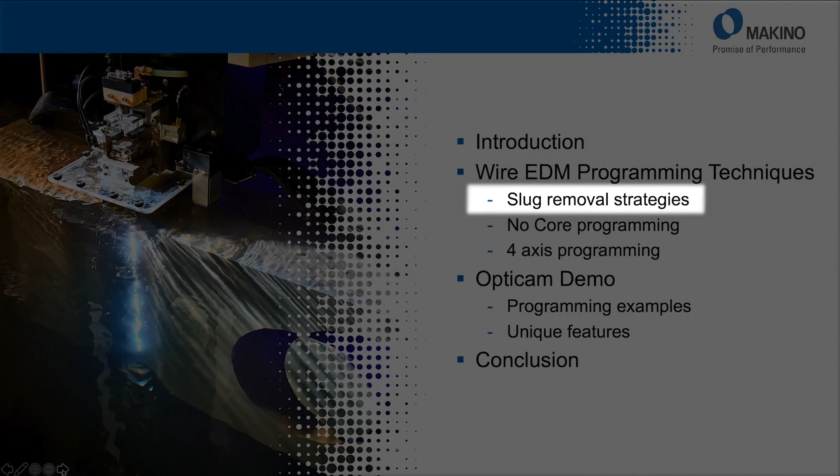Today we're in the Makino Experience Center discussing Wire EDM programming techniques. First, an overview of what we'll cover: slug removal strategies, ways to optimize your programming, no-core programming (pocketing), and 4-axis programming. After the presentation, we'll go to Alan Weeks from Optisolutions, who will give a demonstration of the Opticam software.

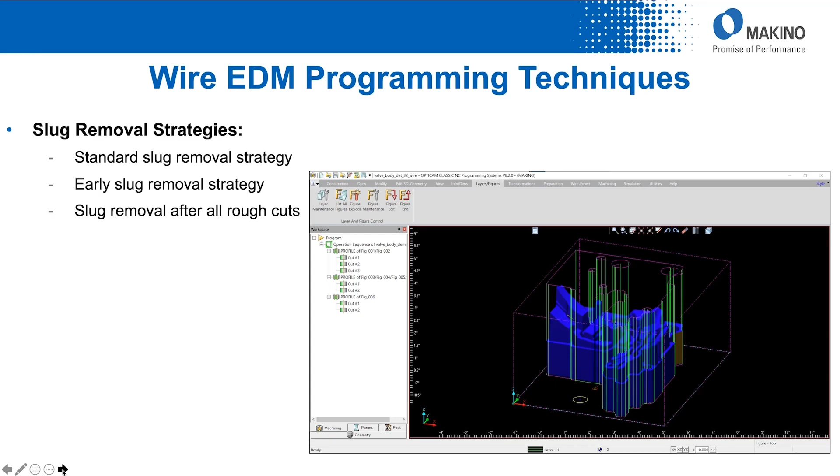Let's get started. First, slug removal strategies. We'll discuss the standard slug removal strategy and explain what that means, then go through early slug removal and slug removal after all of the rough cuts. So what do those mean?

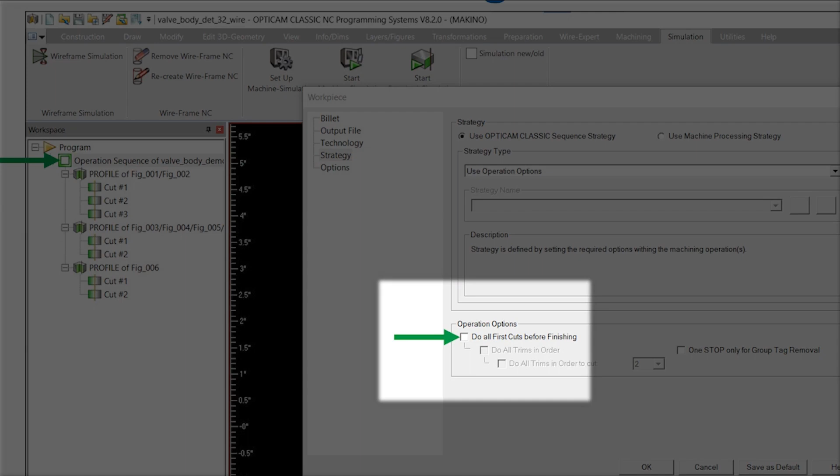A standard slug removal strategy - in Opticam, how am I going to make this work? First, I'll come in here and select my workpiece, and it'll bring up this window. I'm going to not check 'do all first cuts before finishing.' This is a strategy page of the workpiece itself.

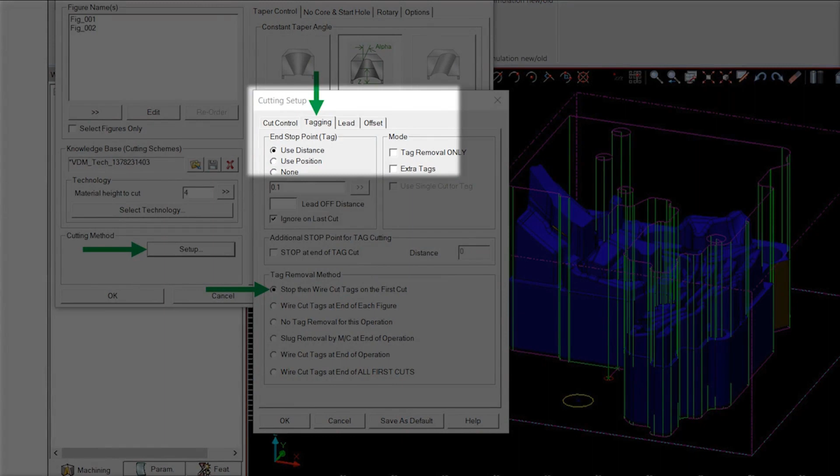Next, I'll go to the profile. This profile is for the holes inside this particular part. When I hit the profile, I go to the setup page and the tagging page, and you can see the tag removal method - I have many options. For this strategy, we're going to use stop, then wire cut tags on the first cut.

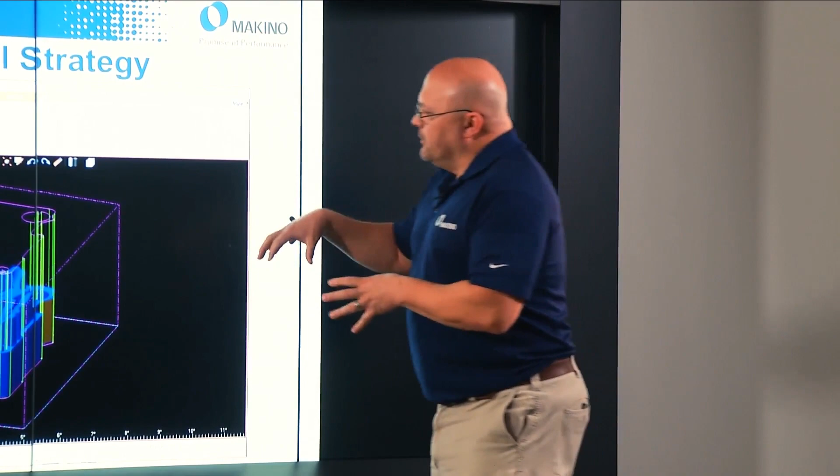Since this is a part with features internal and external, I need to set up a strategy for the outside of the insert. So I'll click on that profile, go to the setup page, tagging page, and wire cut the tags at the end of the operation. I have a video here to show how, by setting up our program that way, it's going to function.

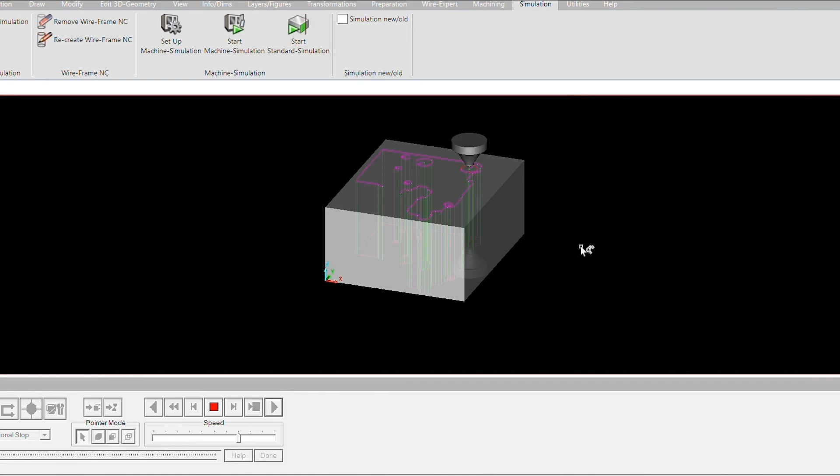Now that we've programmed it that way, it will simulate what it's going to do. We're going to rough the holes, it comes to the stop, then we drop the slug. Every hole internal - these are core pin holes and ejector pin holes - follows the same pattern: rough it, drop the slug, then finish cut it. So every time we're dropping a slug, the operator needs to be there to remove it.

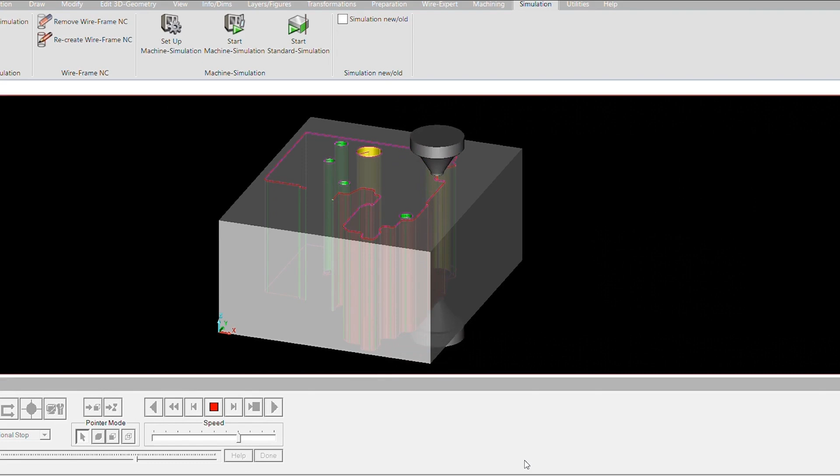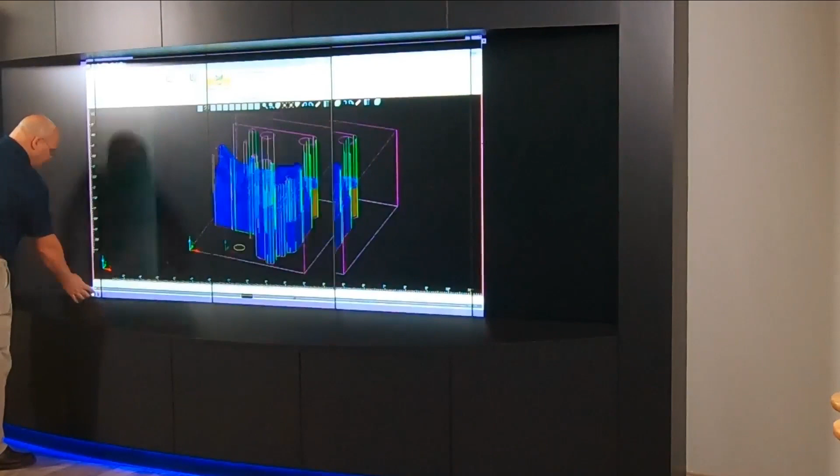This will go through all the holes internally, because that's what we told it to do. Once it's done with the holes, it goes to the insert on the outside, roughing it all the way around, because we told it to wire cut the tag at the end of the operation. Then it goes around and skim cuts it with the tag still connected. It comes to the stop, we cut it off, remove our part, and the part is finished. That's what I'd call a standard strategy for slug removal.

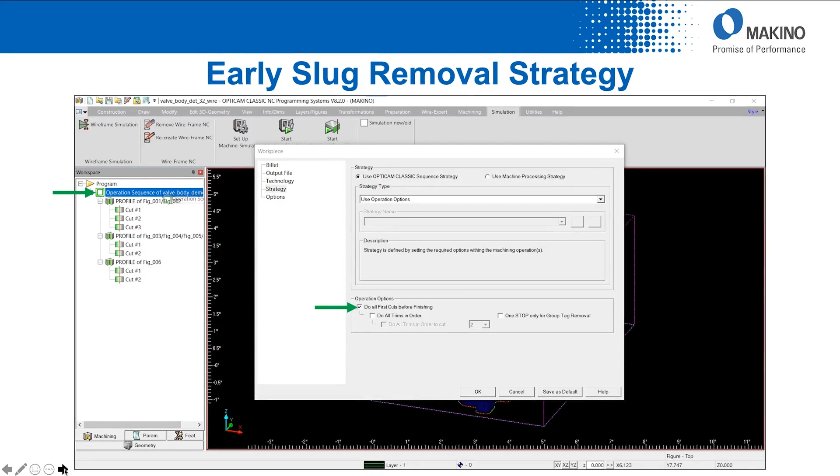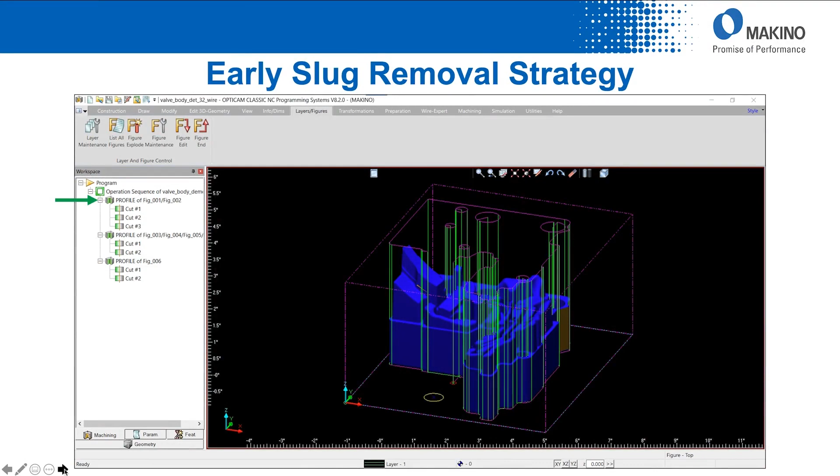Next, the early slug removal strategy. Again, we go to our workpiece, go to the strategy page. Now, unlike before where 'do all first cuts before finishing' was unchecked, we're going to check that. We go to our workpiece profile - these are for the holes - same thing we did before.

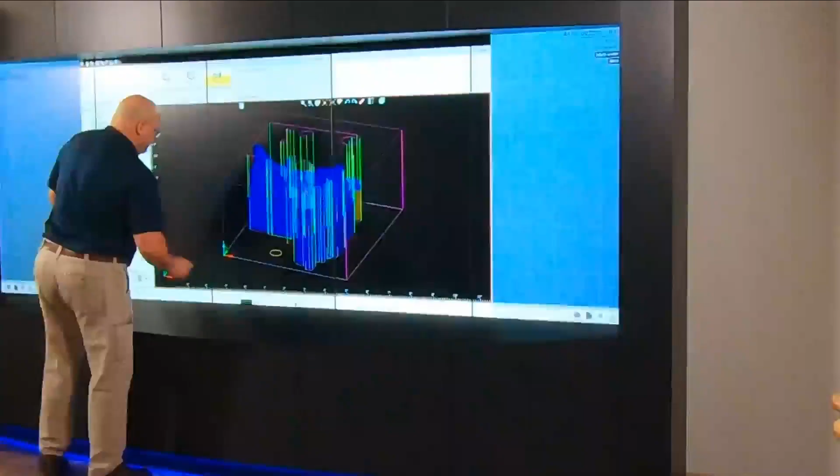Stop then wire cut tags on first cut. For the insert itself, we go to that profile, setup page, tagging page - again, wire cut tags at end of operation. So the only thing we've changed is telling the workpiece to do all first cuts. Just by checking one box, this video will show how that functions.

The simulation starts up. We did the same thing as before - it went to the stop and we removed the slug. But now instead of finish cutting, we're going to rough all of the holes first.

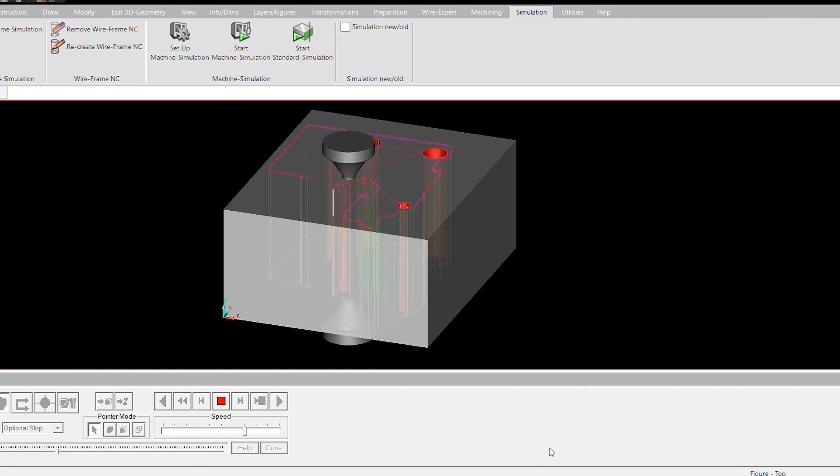You might say, why would I do that? Well, the idea is to minimize operator intervention time at the machine. By doing this, the only time I need to be at the machine is when I'm dropping those slugs for those holes. Once I've dropped all the slugs, now it's roughing the outside of the part. All of this is unmanned machine time.

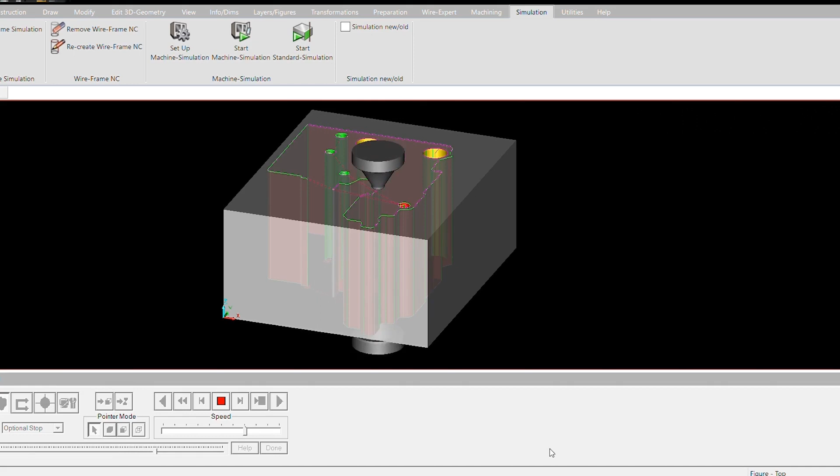Rough the outside, now it goes back to the holes to finish it. All of this is going to be automatic without the operator being there. And then it's going to go and finish the outside of the block. Then we're going to drop the part off. It goes to the stop, the operator comes back, we cut the slug, and the part's finished.

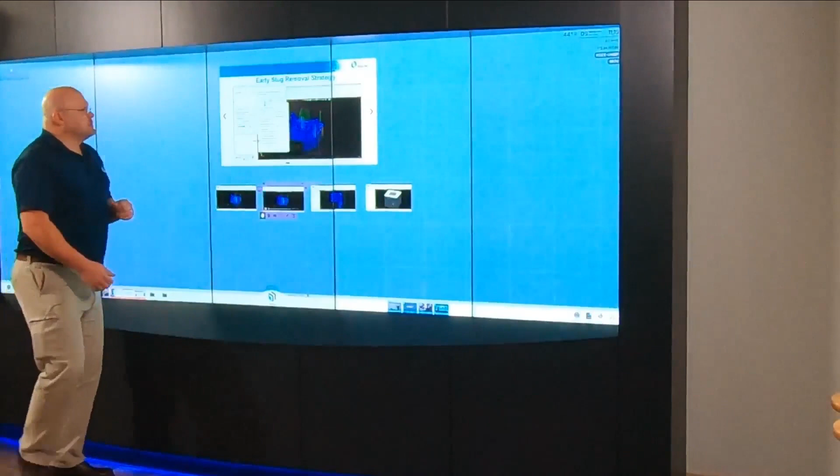So what we've done simply by checking one box was maximize our unmanned machine time, which is how you make money with Wire EDM.

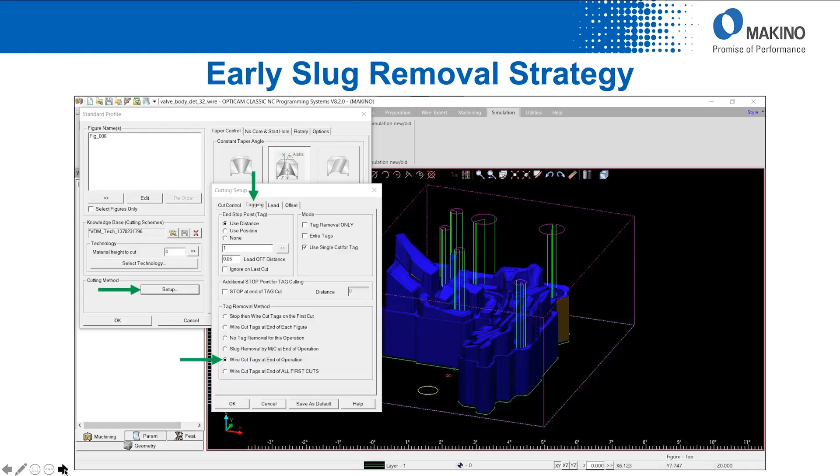So the last slug removal technique I want to talk about is slug removal after roughing. Same thing we did on the last one - we're going to go to our workpiece, and it's going to say do all first cuts before finishing.

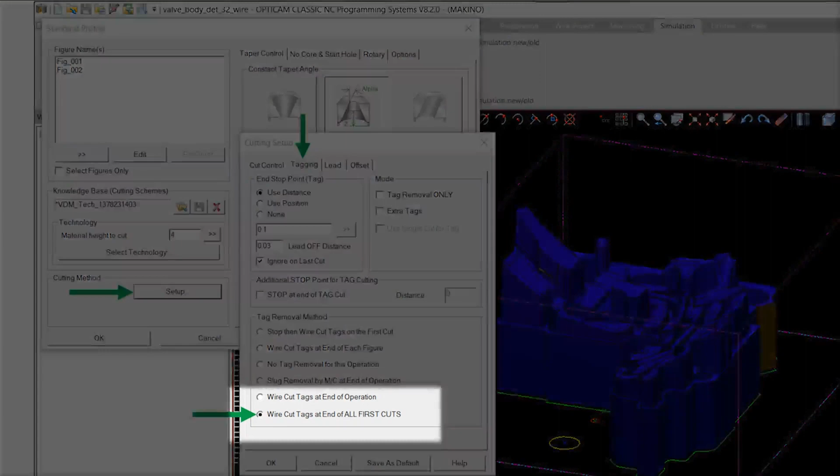Next we go to our profile - these are our holes. Set up tagging. Now this time, instead of clicking on stop wire cut tags on first cut, we're going to go down to the bottom and say wire cut tags at end of all first cuts.

Profile for the outside of the part is going to be the same. We're going to have to go to setup and then wire cut tags at end of operation.

So again, we just changed one more thing, and this video will show you the simulation of that.

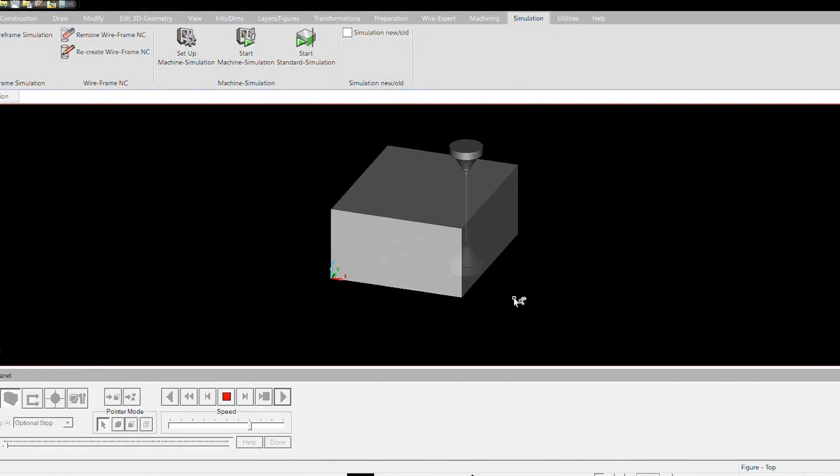On the last one, you remember we went and dropped all the slugs and then it roughed and skimmed everything. Right here, now what it's doing is roughing everything without dropping the slug. That means the slug is still intact on the inside where the holes are. So it roughed all the holes, now it's roughing the outside of the block.

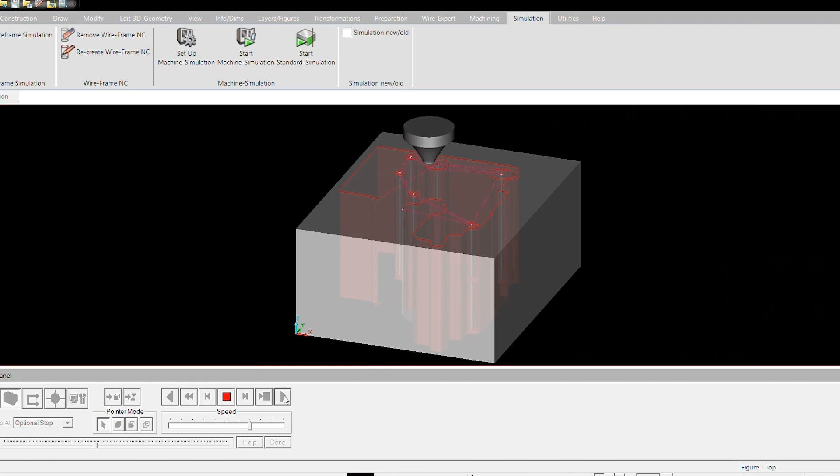Now you might say, why would I want to do that versus the way I did it before? Well, let's say I'm setting up the part right before I'm getting ready to go home for the night, and I want to get as much machining done while I'm not there as possible. By doing it this way, I get all the roughing done.

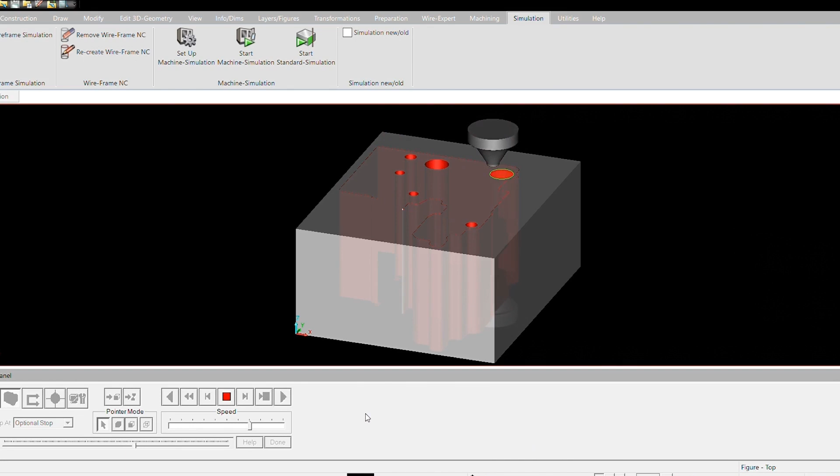Come back in the morning, I drop all the slugs. So I don't have to stay there to drop the slugs - I can leave immediately. So now when I come back in the morning, I hit start, it drops all the slugs. And now once I drop all the slugs, again, I'm done. I can walk away, I can go do something else.

It's going to skim cut all of the holes and skim cut the outside of the block as well. And then once it's done with the skim cut, again, we're going to cut that tag. There it is, part's done.

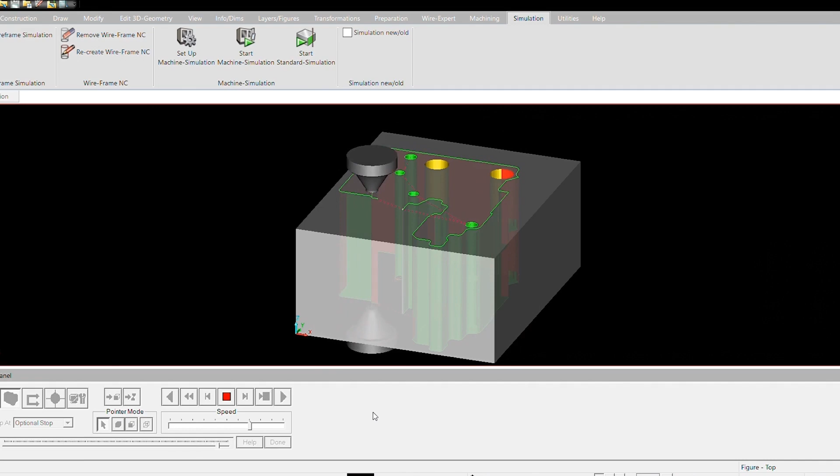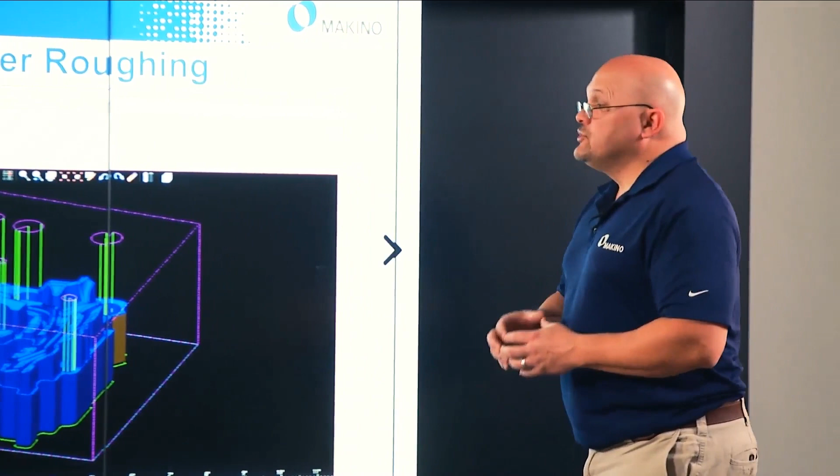So, very easy to change our process, right? There's one nice thing about this software - we can click one button, hit post again, and totally change the way that we're going to process this job. So that's just a few of the options that we have. There are many other ways that you can do it, many other tag removal concepts, but those are the three major ones that I wanted to touch on today.

So next, I'm going to talk about no-core machining. So no-core machining, what does that mean? Well, essentially it's pocket machining using the Wire EDM. If you're familiar with doing pocket machining on a mill, same concept, but we're using the Wire EDM instead of an end mill. And what does this do for us?

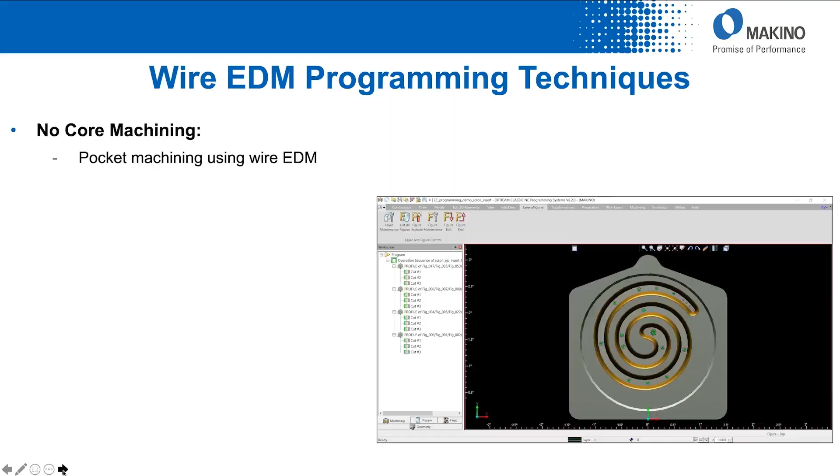Well, it eliminates the need for slug management. So why would I want to do that? If you think back to what I just showed you, we're dropping those slugs. We have to think about how we're going to process a job, when we want to drop the slugs, when we want the operator to be there.

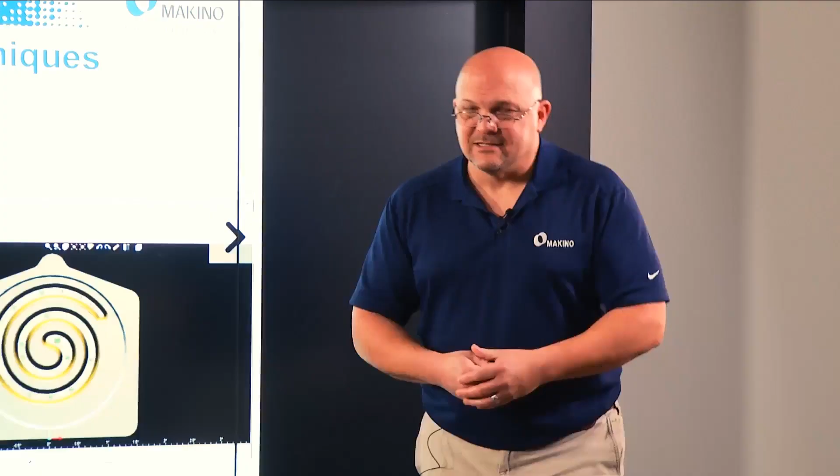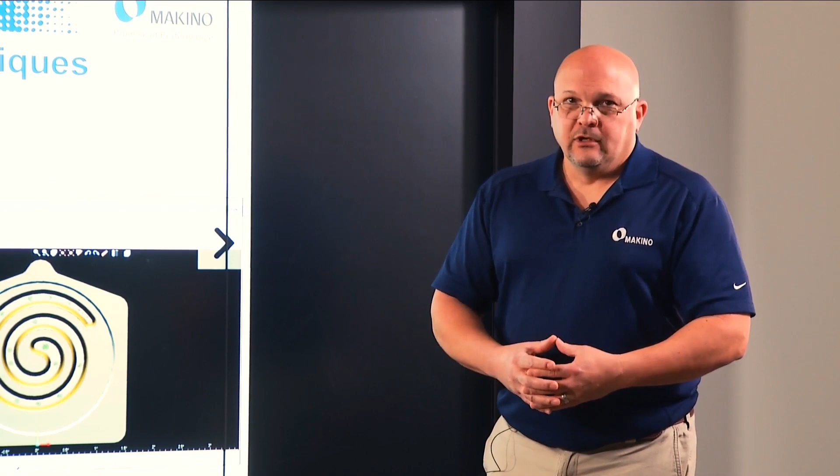That eliminates that. This is primarily used for small features because Wire EDM is a slow process. You don't want to have a really big opening and no-core it because it's going to take forever. But for small features, it's very, very effective, because if I have a small feature and I'm going to cut it like we did in the first examples, I'm going to get a little sliver. And it's not going to be a big slug, and that can cause all kinds of problems in the machine.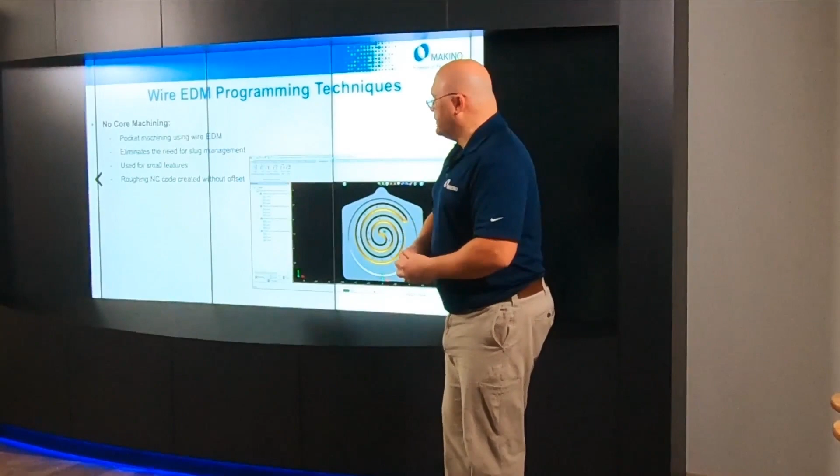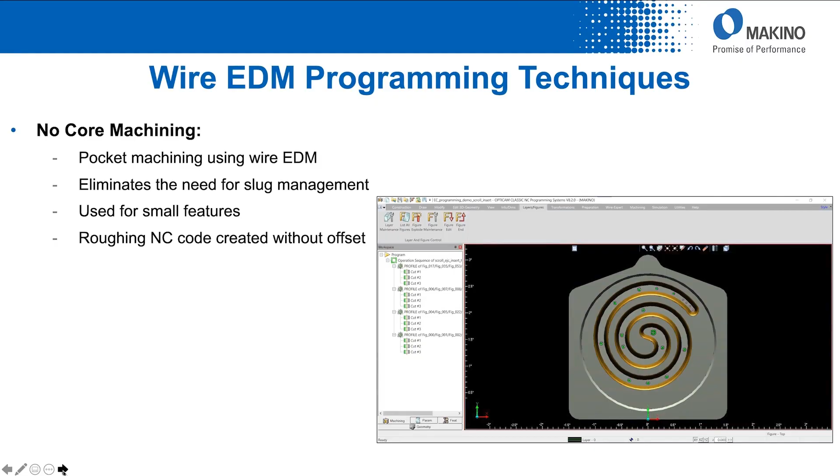Using a no-core technique is very good in those particular instances. To keep in mind when you do no-core, the roughing NC code is created without an offset. So what does that mean? Well, I'm going to show you.

To do a no-core, we're going to go to the workpiece, and once we open the workpiece, there is a tab that says no-core and start hole. So we go to start hole, and we can tell it what kind of start hole we have. Is it a round hole? Is it an irregular shaped hole? You could even create another figure inside of whatever shape you're cutting, and it could be an irregular shape. 9 times out of 10, it's going to be a round start hole.

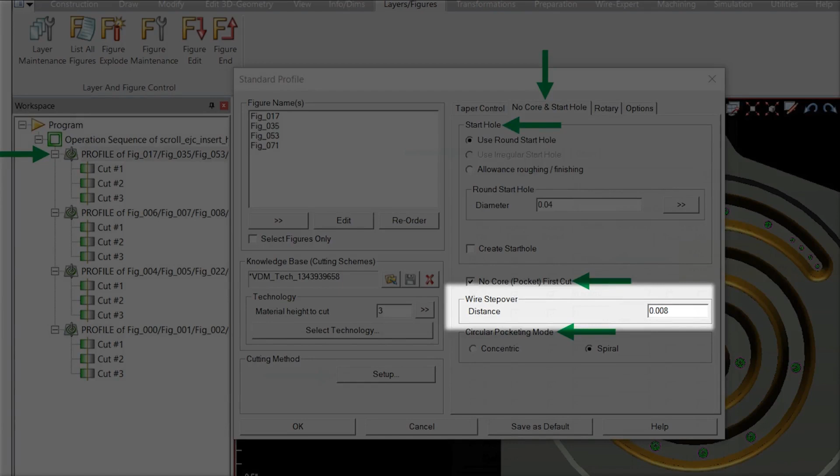And then you would put in your diameter of how big it is. Then you simply check the box, no core, pocket first, and give it a step over distance - how much of a step over I'm going to have when doing the no core. For Makinos and the technology we have, 8 thou, if I'm using 10 thou wire, seems to work the best, so that's why I use the 8 thou. I also have options on the pocketing mode itself. I can either do a concentric, where it's just stepping over that 8 thou amount and cutting a circle - step over, cut a circle, step over and cut a circle. For this particular job, I used spiral.

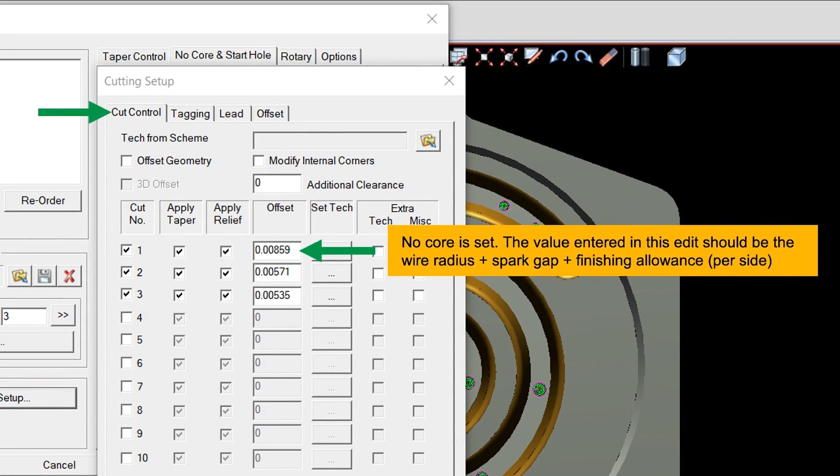So once I do that, then I go to my cut control page - setup page, cut control. Right here in the roughing offset, this is where we load our cutting offsets and cutting power settings, which you'll get a demo of from Alan a little bit later. But for no core, you'll get this message if you hover your mouse over that first offset. It's going to say no core is set. Value entered in this edit should be the wire radius, spark gap, and finishing allowance per side. The reason for that is that it's not going to apply an offset.

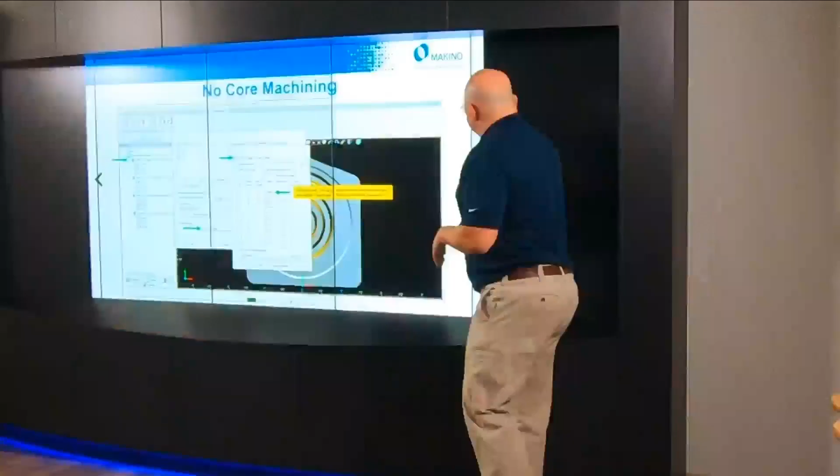So when you do your no core, the geometry is created for the rough cut, and the wire is going to move on the center of that geometry. This slide kind of shows you that. So once I've done the program, it'll generate this code right here. You can see the green shape, and that wire will run right on the center line of that shape, and that's why you have to compensate for that.

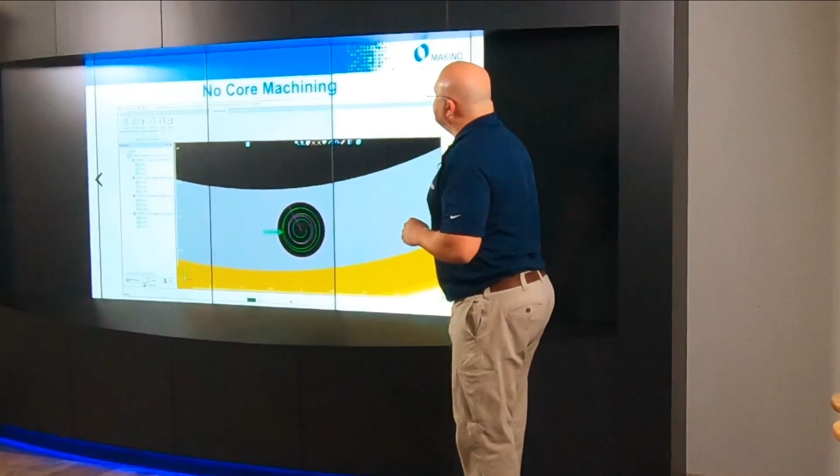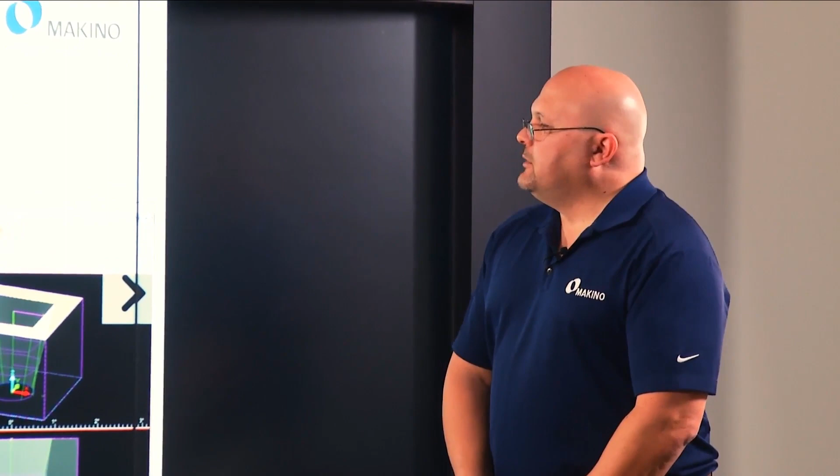So the last technique I want to talk about right now is 4-axis programming. We get a lot of questions about 4-axis programming, how it works, how you should do it. Well, it's a type of taper machining. You can just apply a taper if you want a T value, and it'll cut that angle. But this is a way to do it with 4-axis. This is a really common way to do tapering because so many people use solid models today. You can just extract these angles from the solid model.

So when you do 4-axis, you have to create both an upper and lower profile. Everything we've done previously is just a 2D profile. In this instance, we're going to create both an upper and lower shape.

With the Wire EDM, you need to think about what it is - it is a true 4-axis machine. And what does that mean? It means that I have an XY on the bottom and I have a UV on the top, and they're totally independent of one another. So the way to look at it is I've got two 2-axis machines built on top of one another. Because of that, I can program completely different shapes on the bottom and the top.

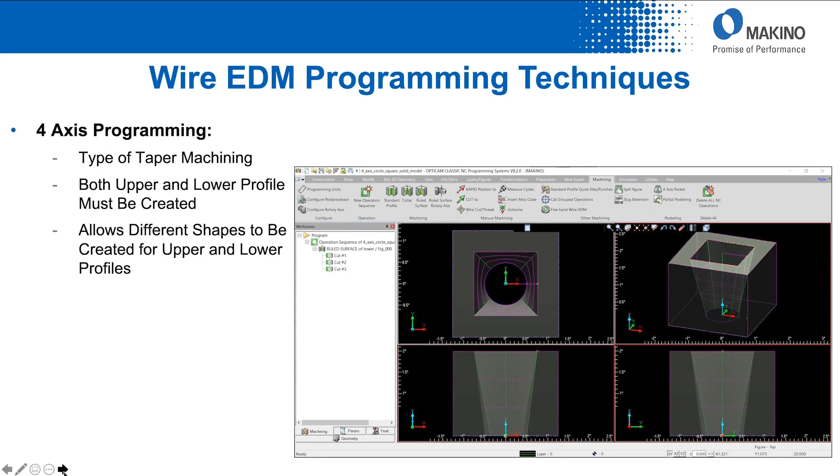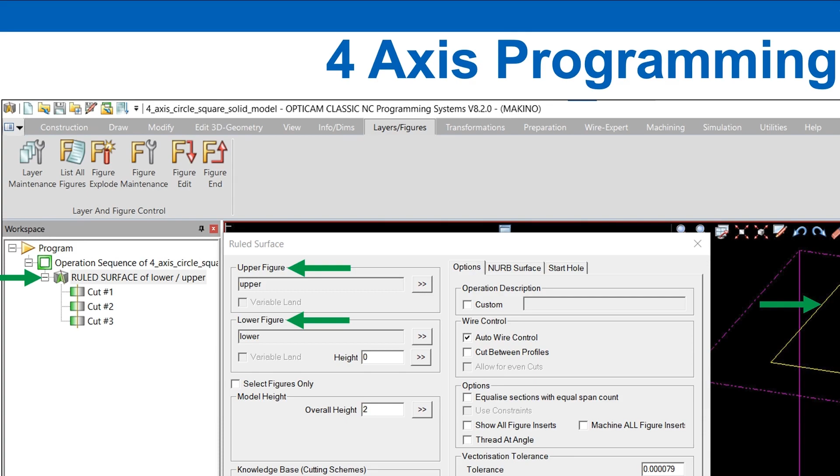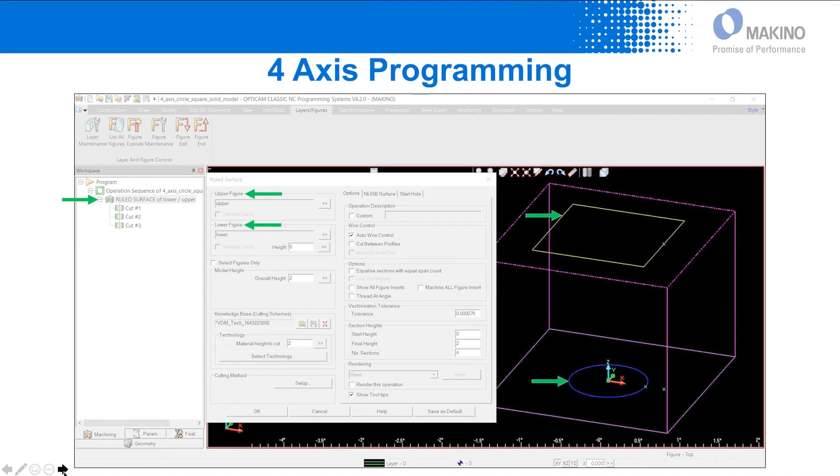So this is a very simple shape here, little circle square. I'd come into program and hit ruled surface instead of standard profile. Then when I click on the workpiece, I have to create an upper and a lower figure. Obviously I'd create my geometry prior to this, and then I select it. If you look here on the graphics, the blue is my bottom geometry or lower geometry, and the yellow is my upper geometry.

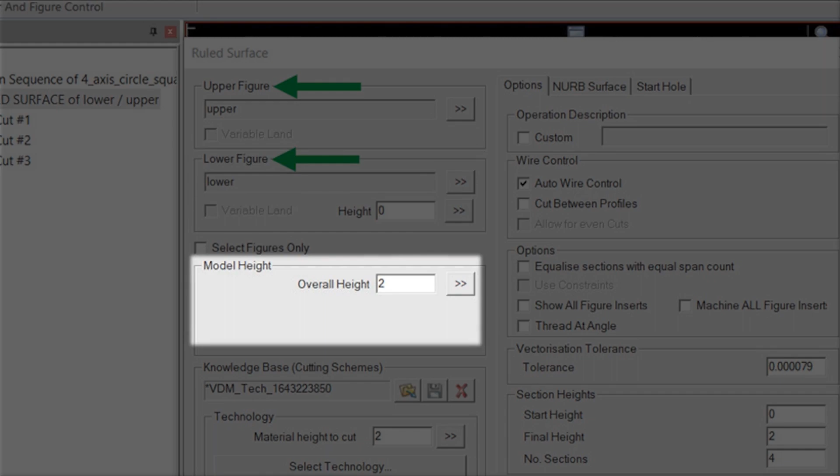I have a couple things that I have to tell it. Where is the lower geometry? You can see in that window there, it asks what is the height? In this case, it's right at 0, which would be table level. The overall height is the distance between the two shapes - for this example, it's 2 inches. Now, I could move that part off of the table. If I'm on a fixture or something, if it's up 1 inch, well then my lower height would be 1 inch - it would not be 0, because the table is always 0. And this software will compensate for that when it does its post-process.

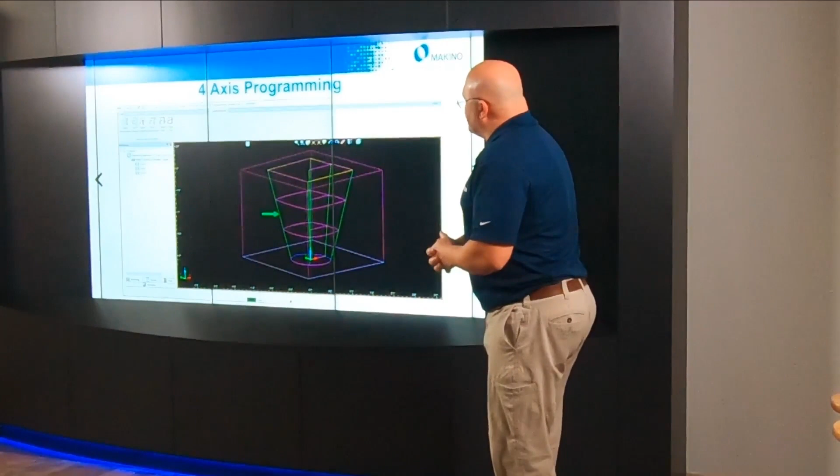Once I do the program, this is the wireframe of the actual program that it creates. You can see it's going to apply my angle, and you can see how the shape changes from a circle to a square gradually as you move up that angle, okay?

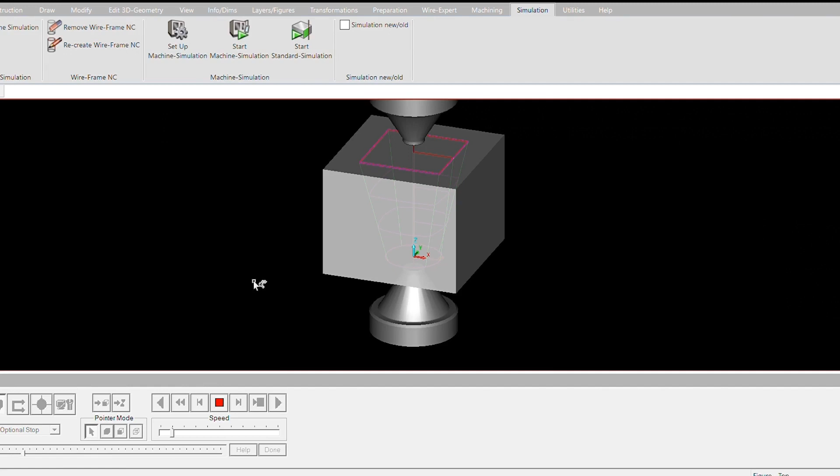So I do have an example of this one for a simulation, just to give you an idea of what that looks like. So now we're going to come here and do the simulation. You can see how the upper and lower head are going to move totally independent of one another. So I'm cutting a square on the top and I'm cutting a circle on the bottom.

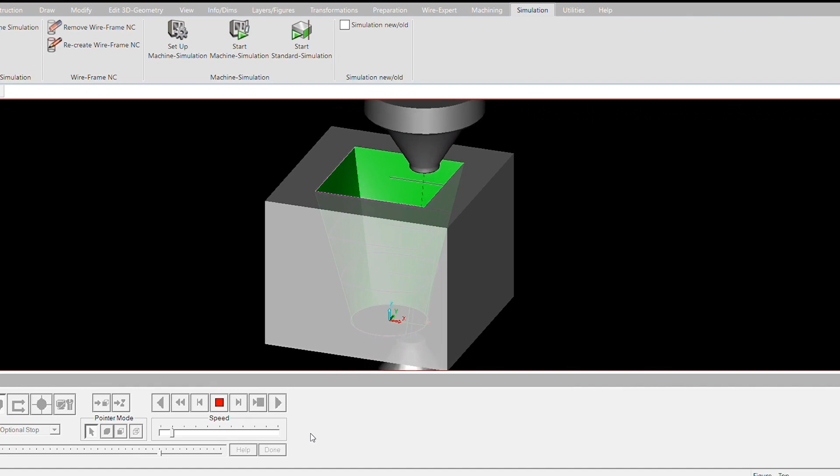It comes to my stop and it cuts the slug. Nice feature of this software, I can actually test this slug release. By clicking a button, it lets me know that that slug will come out of my parent part. The reason for that is because it's 4-axis, totally independent programming - I could write a program where I could lock that slug inside of my part and not be able to pull it out, just based on whatever shape I was cutting. So it is a very nice feature of Opticam. And that's the simulation.

Okay, so that's it for the presentation. I just want to give you a quick overview of what the software has to offer, how easy it is to change your processing, change your concepts of how you want to do things. Right now we're going to go over to Alan Weeks, and Alan's going to give us a demonstration of the Opticam software. So Alan, take it away.

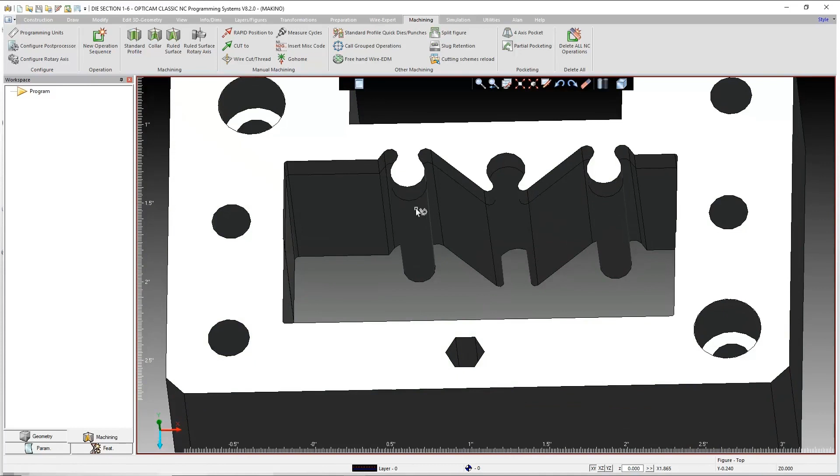So if I fit that back to the screen now, what I'm going to do to remedy that is I'm just going to right mouse click on this bottom face and select the face option, and select this option, rotate to plane, just to get it in the correct orientation, which in this case we want that face to be in the XY plane. We want to datum that plane and rotate all the solid items.

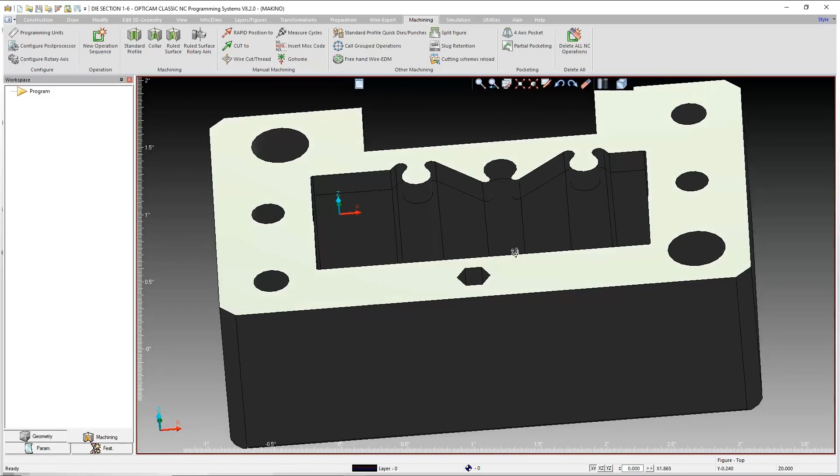Now if we look at this and we go to our XY view, you can now see it is in the correct orientation. So once we've done that, we can go ahead and start our programming process. So to first of all get what features that we want to machine in this block or create a program for, I go to our Wire Expert menu, and I just want to select this option called Automatic Feature Recognition.

So in this first process, I'm just going to create features for all the internal die features only. This is just a clearance cutout, so I'm going to come back and do this as a manual feature. But to get all my internal features, I'm just going to select internal die features only, select OK, and then it will highlight all the features that it found.

Okay, so if I look at this first group, you can see that it's found this hole. It's put it in a magenta type color that you can see, and then anything that's been grouped with it will be in yellow.

So these have actually been grouped together. Now if I look at what else it found, I found these bolt holes. I really don't want to include those, so I'm just going to right mouse click and say delete group, because those are already going to be pre-drilled. And then also these lifter holes, I don't want to do anything with them. They've been pre-drilled as well, so I'm just going to delete that group.

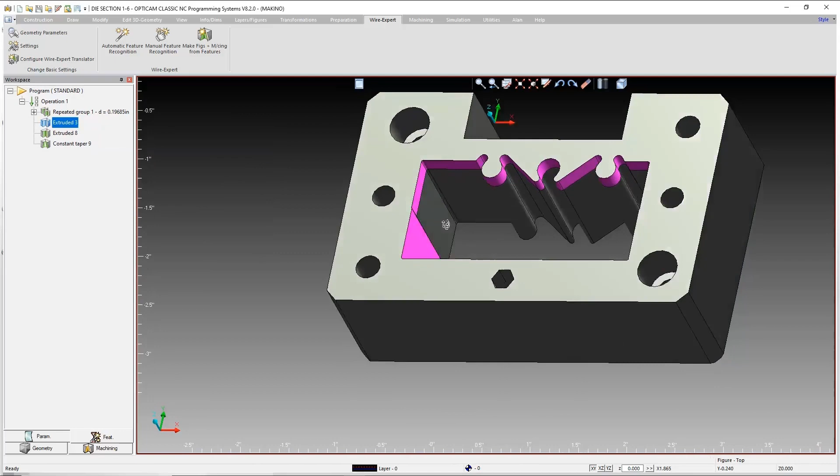Then we have the heel and the land for the die opening has been found. That's good. Then this hexagon has been found. We want to wire that as well. And then the taper has also been found.

Now, one of the things I wanted to point out is that we have arc to arc conditions here. This can sometimes cause undercuts when you have arc to arc conditions. So I know that's probably going to cause an undercut or an issue with the toolpath or the NC code, so I'm going to force this to output as 4-axis code instead of just a simple constant taper.

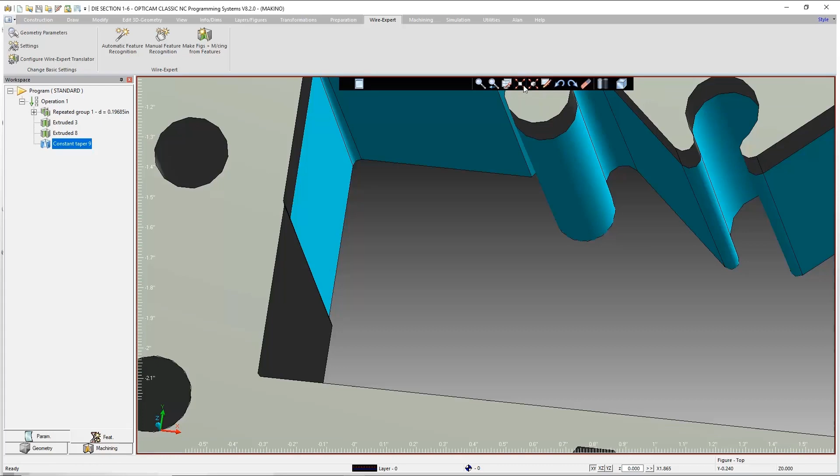Okay, so all that looks good. So I'm ready to go ahead now and create a manual feature for this clearance cutout. I just go back to the top of the Wire Expert menu, select manual feature. I'm going to do manual face selection, and I'm just going to pick these 3 faces. And then I'm going to end the selection, finish feature, and then end the command.

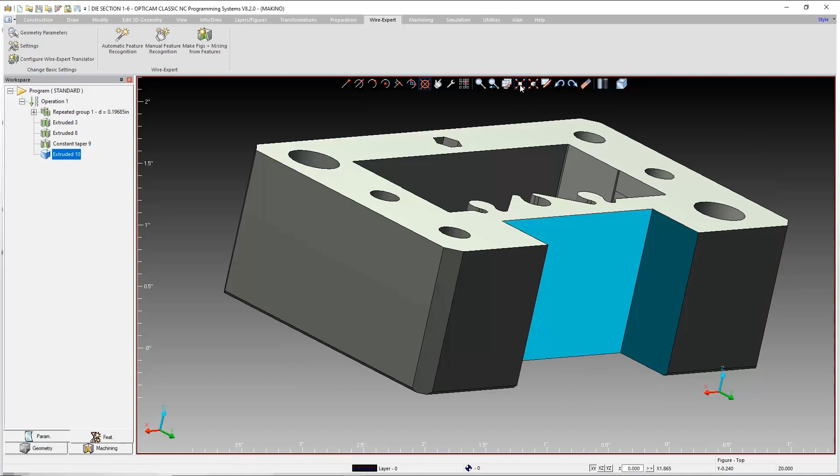So now it has a feature created as well. Okay, so all my features have been created. Everything looks good there. So I'm going to go back to my XY view, and I'm going to create all my machinings. It's also going to create figures or project everything at the correct heights based upon the solid model. So I'm going to select this option called Make Figures and Machining from the features.

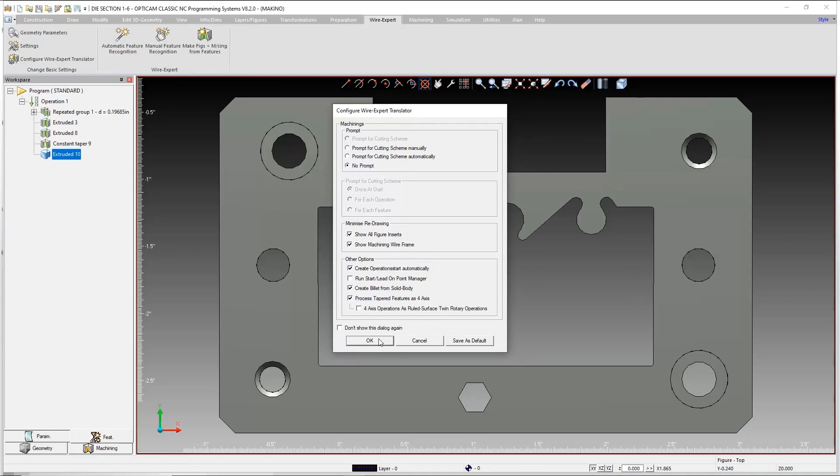Not going to apply any technology, I'm going to do that later. I'm going to go ahead and create a billet or workpiece from the solid body. And this is the option I was talking about. I'm going to process all the tapered features as 4-axis. I'm going to select OK, and then it should go ahead and apply toolpath to all those openings.

So we'll give it just a minute to do that. And that's exactly what it looks like it has done. So let's go ahead and finish the programming side of this. I'm just going to start at the top of my machining list, so I'll go to my machining tab at the bottom. These are all the machinings that's been created from those features from automatic feature recognition.

So I'm going to go to my operations sequence. I'm going to give it a part number, part description. I'm just going to call it a die block. All of this is optional, you don't have to do this. So you can put this in or not.

Okay, it created a billet that you see here from the solid body. I'm going to give it an NC file name, just call it anything there. This is where I'm going to post the file to this directory. I can post it directly to the machine if it's networked, or whatever user specified directory that I want.

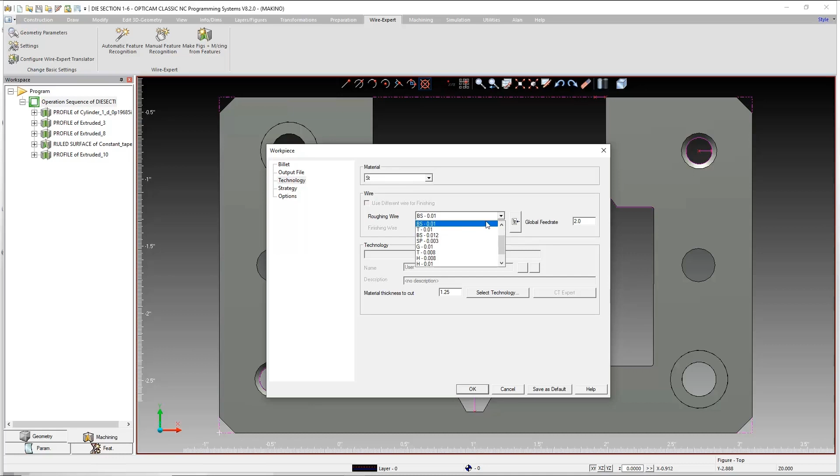If I go to my technology, this is the material I'm going to be cutting, it's steel. What wire type am I going to be using? Just brass 10 thousandths wire. Also, being that there's a lot of material being removed here, I am going to tell it to do all first cuts, all my rough cuts, before I do any trim cuts.

Okay, now that that's been done, I am going to come in here to my cylinders or my dowel holes. I'm going to go ahead and just pick these in the order that I want to machine them in this particular case, because of where I'm starting at this corner.

So I want this to be my first shape that I'm going to cut. Now I'm going to select my technology based on 1.25 inch thick. That brings up my select technology. In this particular case, I'm using the Makino U series. I'm going to do a 2-pass technology on pretty much everything, so 2 cuts there. This is the power settings, the offsets.

So I load my technology, go to setup, 2 cuts. I'm going to put in a little bit of clearance here, minus 0.0001, or a tenth per side, just to make sure that's a tap fit for those dowel holes. The tagging is the glue stop or the tab, we refer to it as tagging. So I'm going to put a 50 thousandths glue stop there, and just let it lead back to the center of the hole.

I'm going to stop and wire cut tags on the first cut. I'll lead on with the line, off with the line, and cut counterclockwise with the wire offset to the left. It's doing this because I'm using auto direction, which is mostly what you'll use most of the time. I'll select OK to that and OK to this. This is where I could put comments in the code if I wanted to, but in this case I don't, so I'll just select OK.

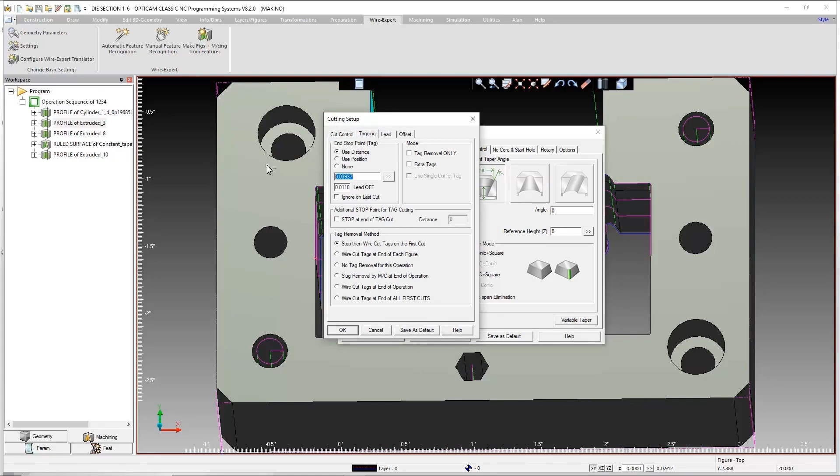No clearance this time. We'll put in a tag distance again of about 50 thousandths. We will lead off about 12 thousandths, drop the slug on the first cut, lead on and off of the line. And of course we're still using auto direction, so we'll say OK to that and OK to that, no comments in the code. So now we've applied technology for that.

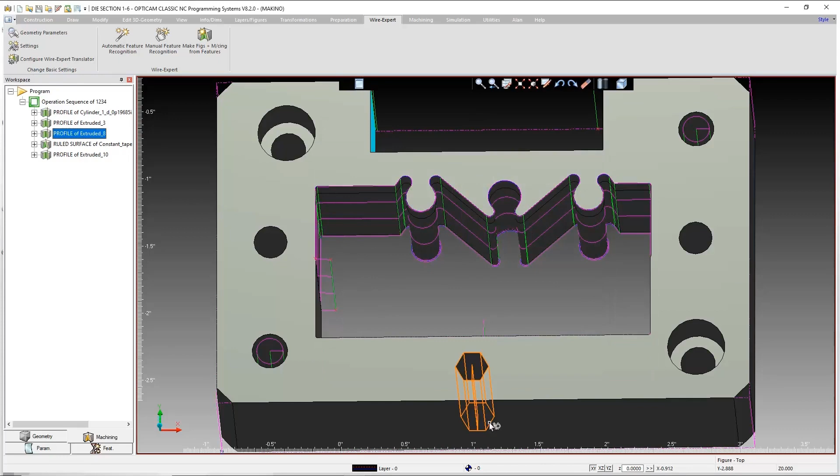Now this hexagon here, we want to do something special to it. So I'm going to go into the standard profile operation, or the machining operation. We'll load 2 cuts again for this particular one, using the same nozzle characteristics. We'll load 2 cut technology. Now in this particular case, instead of dropping a slug, I'm going to do a no core or pocketing operation.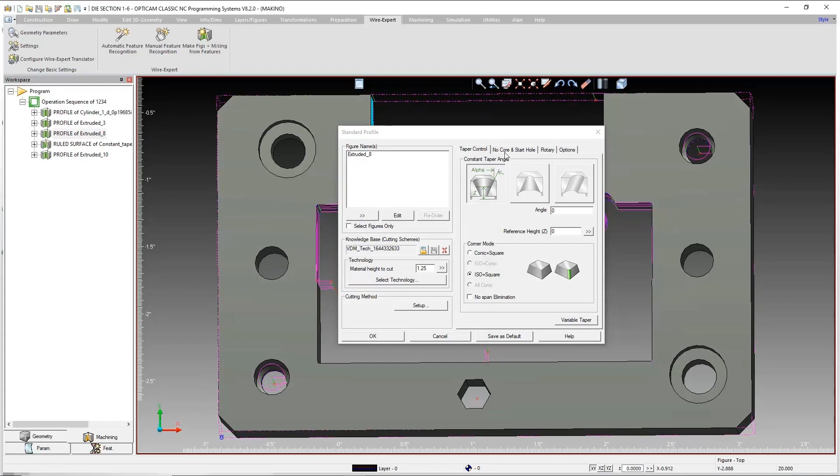I'm going to put in something like 0.09 as my start hole. But just to make sure my hole location is good, the hole's not angled, I'm going to drop that down from the actual hole size, just so it starts no coring early and we don't have to worry about any short circuit or anything like that. So I'm going to no core pocket the first cut, standard pocketing, and put an offset step-in distance of 6.5 thousandths, just a little bit more than half the diameter of the wire.

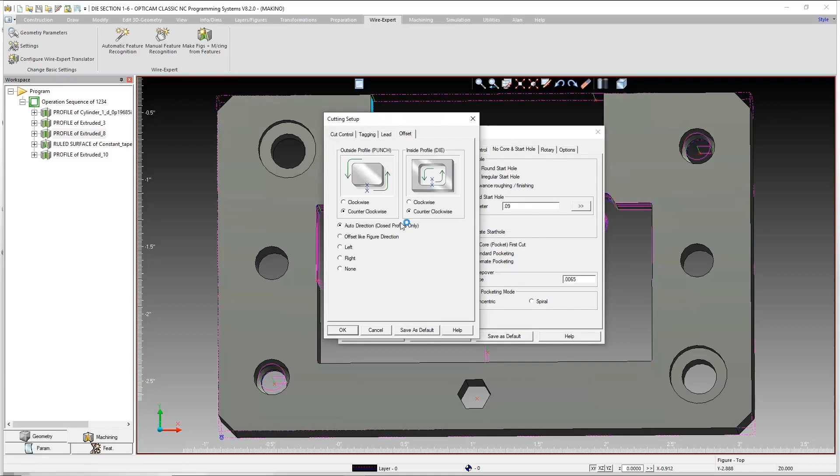Then my trim cut will be my second pass, and then all these other items will apply. Lead off, I'll just let it lead back to the start hole location, and you'll see the tagging is grayed out because we're not dropping a slug. All these options we can just say OK to, no comments to the code. We'll take a quick look at what the no core tool path looks like: not dropping a slug, but slowly eating that material away. So we did our no core.

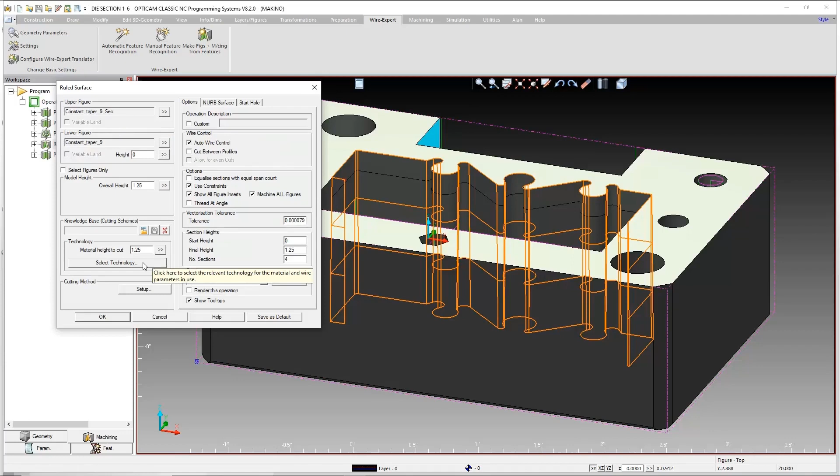Then our ruled surface operation, remember we had that option set to output the taper as a ruled surface. So it's taking all this information from the model. Really, this is just a clearance angle. So in this case, I'm going to just do a rough cut only. If I go into setup, you can see it has a rough pass offset only.

Tag distance, we'll put in something again about 50 thousandths. In this case, really, we don't need a slug, not going to have one to drop because it's such a slight angle. So I'll say no tag removal for that, and then we'll just let it lead off back to the start hole location. All this is preset for us, so we'll just say OK to that, and OK to that, no comment in the code.

And then lastly, what we'll do is we'll load just a one-pass technology for this.

Okay, so I'll just go to my select technology, use the same nozzle characteristic, and then we'll select rough and cut only, load technology, and go into tagging. We'll give it something like a 50 thousandths tag, and let it lead off, about 50 thousandths as well, and drop the slug on the first cut. All of this has been preset.

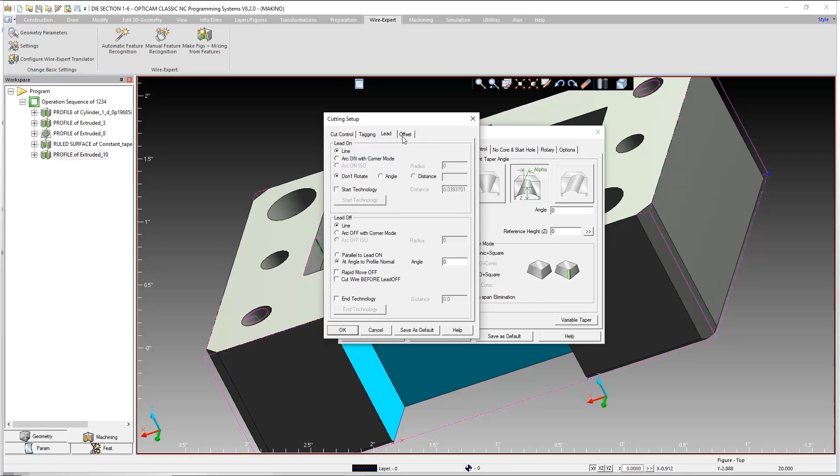Select OK to that. Okay, so once we've applied all the machining, done everything we wanted to do, and associated the technology, then we can run our simulation. So if I go to simulation, I'll start standard simulation.

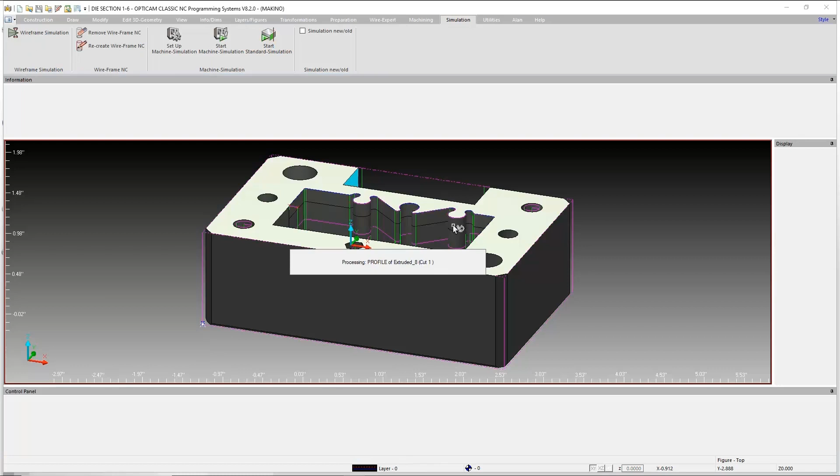Okay, so we'll just center this and fit it to the screen. I have my speed control, and it'll stop at my optional stops, so we'll go ahead and select that. We'll zoom up, and you can see it stopped at the glue stop, or the tag.

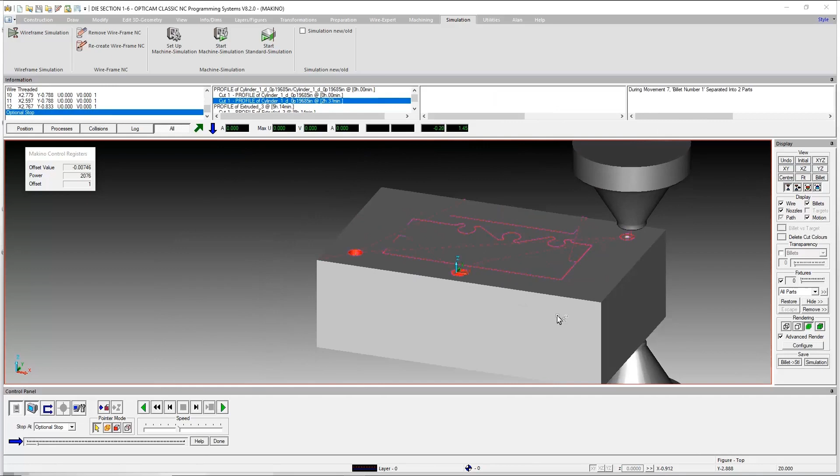It's going to drop the slug. And remember, we're roughing everything out first, so it's doing all our rough cuts first, removing the slug, and it's going to come and cut our rough cut of the heel, straight heel area, and also the land area.

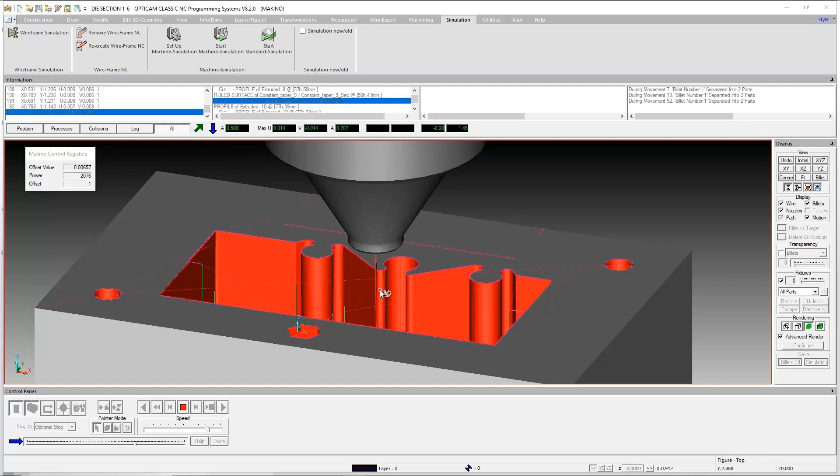We'll just speed this up a little bit. It's going to drop the slug, then it'll do the no core — we'll definitely speed it up for that. So it's just slowly eating that material out instead of dropping a slug. Then, when it finishes doing the no core, it should go and cut our taper cut, the clearance for the land. And then lastly, it'll come and drop the slug for the clearance.

Then it comes back and does all the trim cuts for the land. And I can reorder any of these that I want in the list.

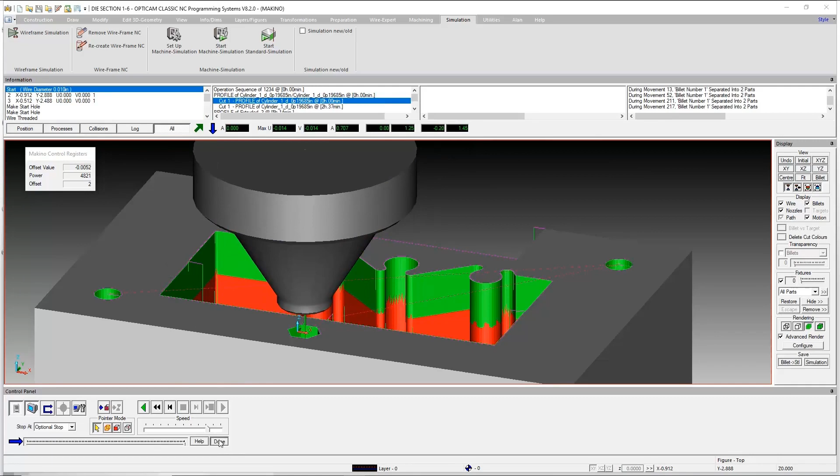So the simulation looks good, that seems to be done. We can go back to our top view or XY view. If all the simulation looks good, we can zoom in and see graphically as well the number of cuts it did. Then we just post-process our code, and quickly and easily we were able to generate a program with different operations being done to it and have code ready to load into the Makino wire machine.

So that's the steps of what you would do for using the feature recognition, or the Wire Expert, within Opticam Classic. I hope everybody found this information useful. And Brian, I'll turn it back over to you.

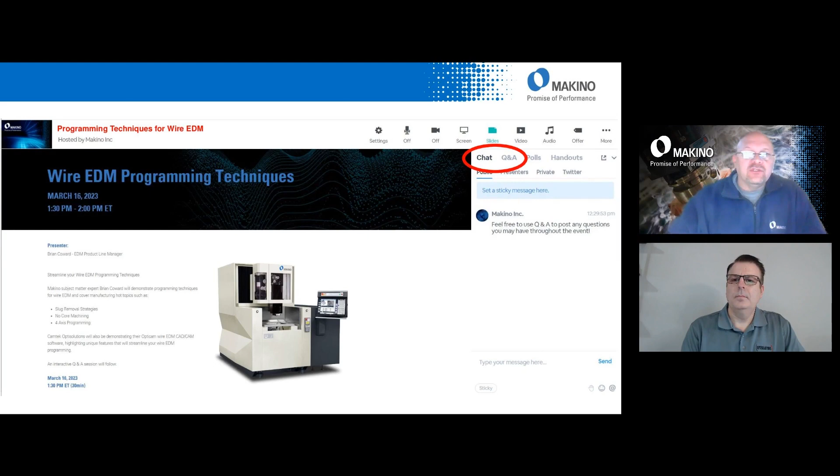So Dennis asks, what do you consider small holes for no core? Well, for me, it really depends on the start hole, and I think Alan kind of pointed that out with even that hex shape. If the start hole is bigger, you can still no core, and it's still beneficial. I just mentioned small holes because typically in a mold setting, if I'm doing core pinholes or ejector pinholes, if it's a smaller hole, like an eighth inch or smaller, I would just always try to no core those because it's easier than putting in such a small drill. But when you pre-drill it for the start hole, you could make a bigger hole so you could no core that as well. It's really up to you as to how you want to process that.

And it looks like Adam answered the question in the same exact way. So thank you, Adam.

Dennis also asks, he's currently using Wiz, and what's the benefit to switching to Opticam? Well, to give you some background, Opticam is just an updated version of Wiz, essentially. Wiz was branded for Makino, but it was created by Camtek.